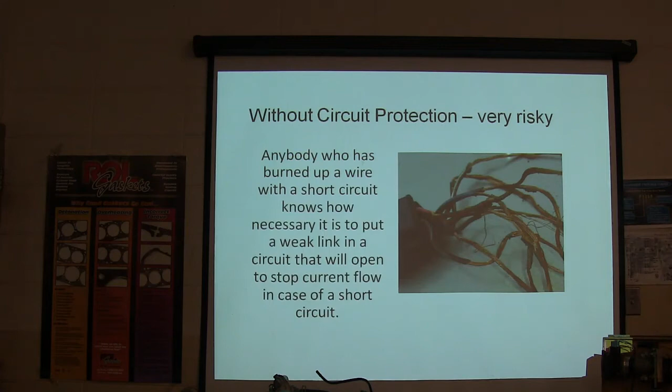Anytime you don't have circuit protection, you're taking a lot of risk. If anybody's seen wires that burned up, you can have a piece of wire this long inside the cab, and if the insulation burns off, it'll fill the whole cab up with poison smoke. Really bad news. So in order to protect the circuit, you've got to put something in there that will fail if a short circuit happens.

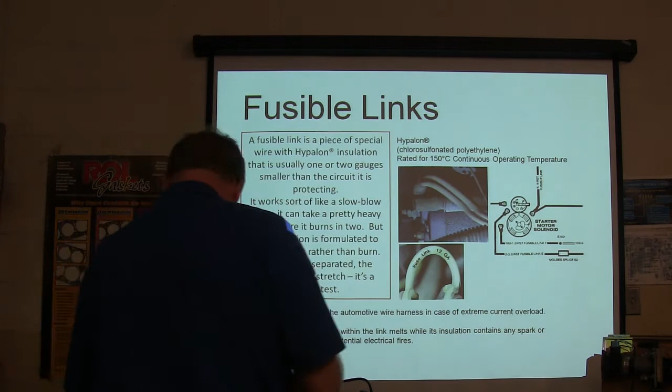That makes sense, you don't actually want all that. It sounds like something that would be really silly, but here's the fusible link. A fusible link's insulation is usually 1 or 2 gauges smaller than the circuit it's protecting.

You'll see them coming off the starter, because a lot of the time the starter is going to be the junction where they hook things up. Whenever the alternator wire goes over there and hooks up to the same post on that solenoid where the big battery wire goes, the wire leaving that alternator post makes it back to the battery, typically the shortest way possible. GM likes to put it down here on the starter. Ford, if it's got the solenoid up on the firewall, they'll put it there. And that's how it is.

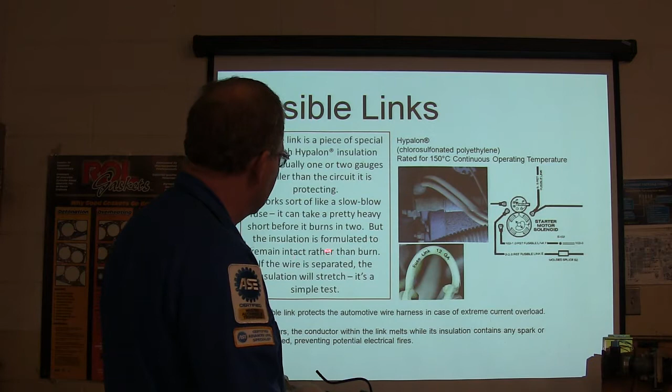It's kind of like a slow blow fuse, these fusible links are. It burns in two, but the insulation is supposed to remain intact rather than burn. If it's separated on the inside, you can't just look at it and tell—you're going to have to stretch it. If it'll stretch, it's burned in two, right.

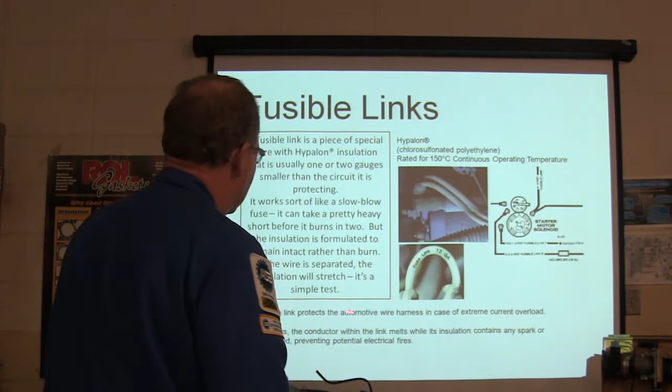It protects the automotive wire harness, and it doesn't just blow like a fuse. It takes a really, really strong short, a lot of current, to blow a fusible link. That 12 gauge fuse link is probably going to be protecting a 10 gauge wire or something.

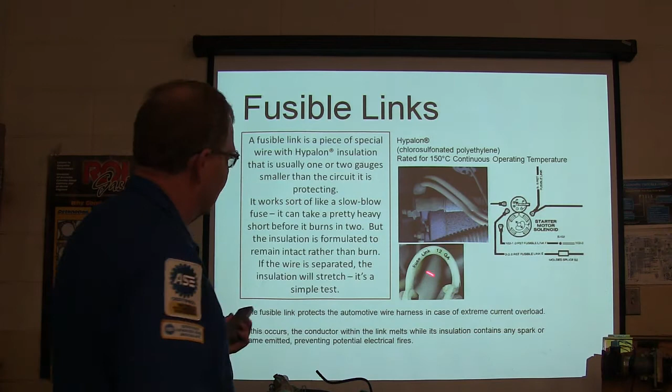So you've got heavy current circuits. Here's what I was talking about earlier. You see this battery is hooked up to that part of the starter, and the alternator is hooked here, and they'll have a fusible link right here typically. There'll be a fusible link for other places too.

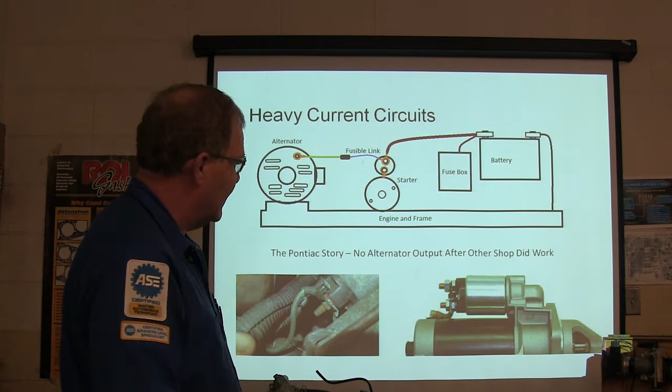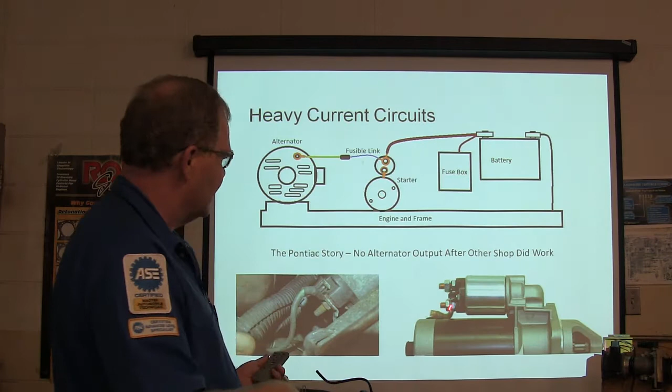So when we got in there and looked at it, we saw that they had just put it on the one that was easy to get to. It makes a difference which one you put it on, even though they both look almost just alike. So you're always going to put it on that one right there if you've got a big fusible link wire in there—you never put anything else except that under that one.

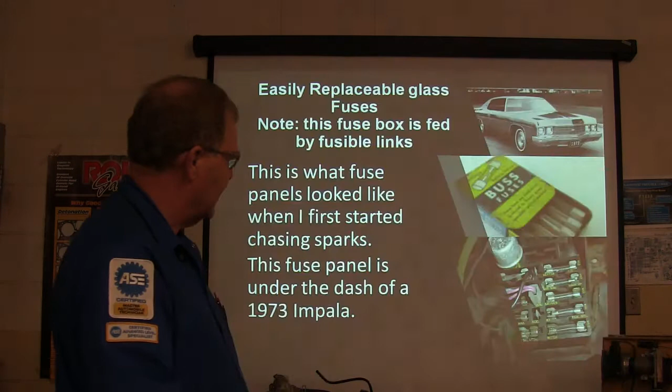Some of them will have a hard copper strap going down in there. Now, easily replaceable glass fuses, like these right here—when I first started working on cars, that's what cars had on them, glass fuses. Some of the Volkswagens had funky looking ones. That's what a fuse panel looked like when I first started. This is a 73 Impala, and those are the kind of cars that was out there.

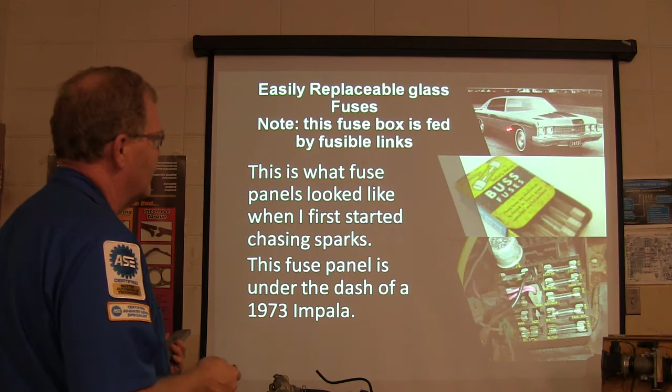And that's me sitting on my Volkswagen Bug, that was a 58 Volkswagen Bug. We shaved 125 thousandths off the cylinder head on that thing. My dad had a shop. And boy, that thing looked like a Porsche. It was a ragged looking thing, but it would fly. But that's what the old Volkswagen fuses looked like.

You probably noticed we lived in a sepia tone world back in those days. Everything was a sepia tone, it wasn't even in color. You notice all them pictures are like that? No, actually, that's not the way it was—this is just the pictures have gotten rotten.

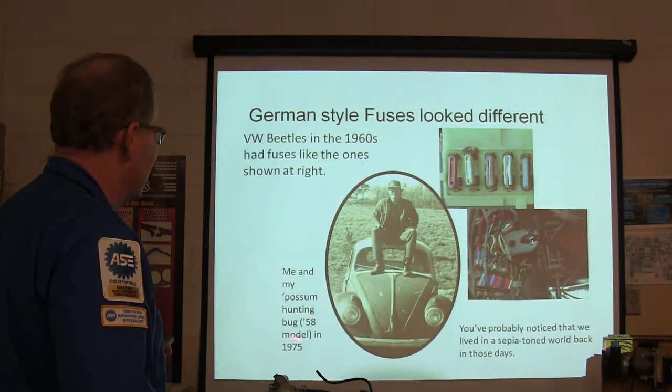Hope they don't come get me on that.

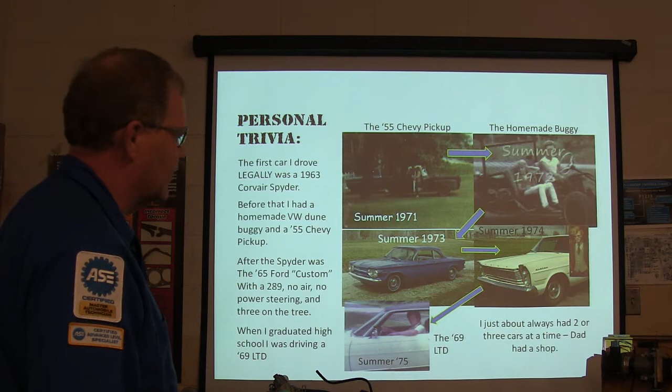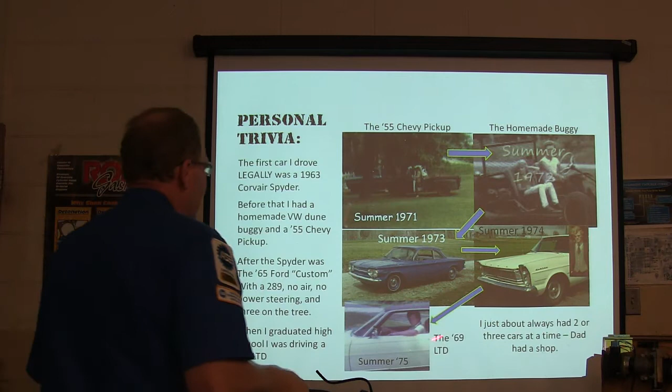In summer of '74, I got this '65 Ford Custom, and it was 9 years old then. I sold that car for $200. It still ran real good. But that's what cars cost back then. I mean, you could buy a 9-year-old Chevy pickup for $150 because they were just sitting there. There's a '69 LTD, and when I graduated from high school, that's what I was driving then. I was just about always had 2 or 3 cars at a time. I always had something to drive. When your dad owns a shop, you're never short on anything to drive.

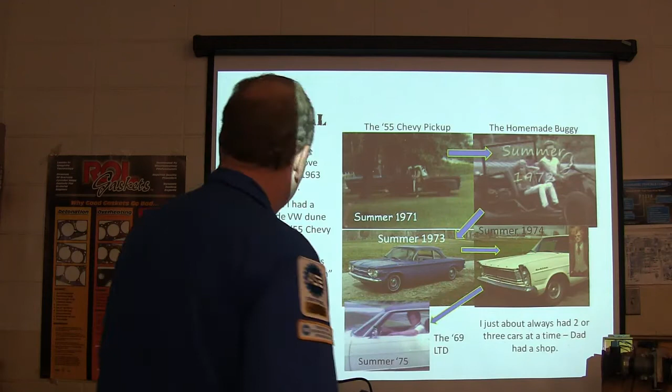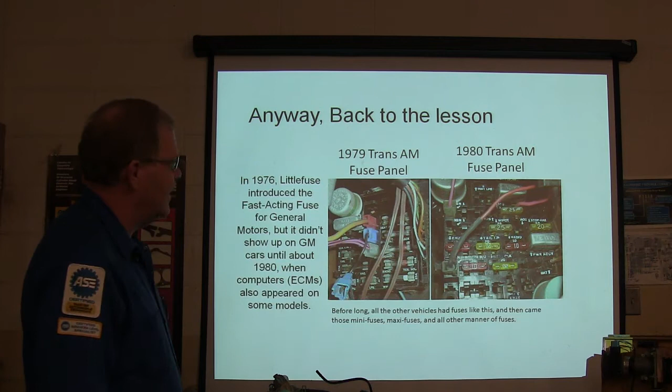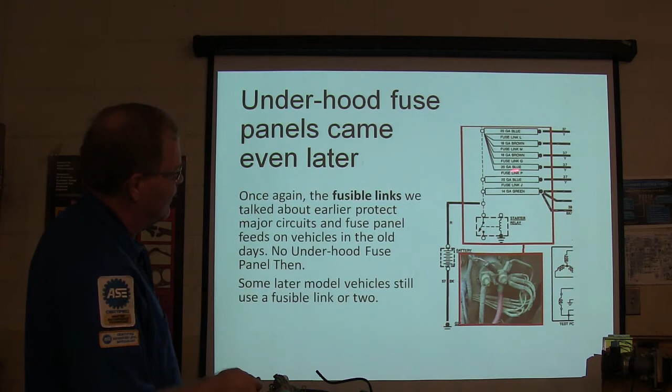Now see all these fusible links coming off that thing? That's the junction that Ford was using, and they would feed everything off of that. Fusible links were all different gauges. They'd even give you the color of them and all that sort of thing, and the major circuits were fed by those.

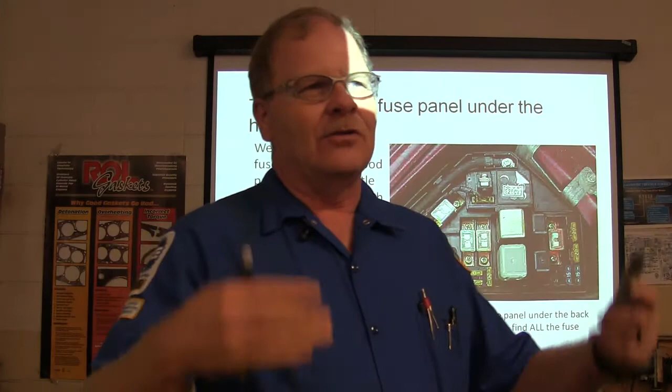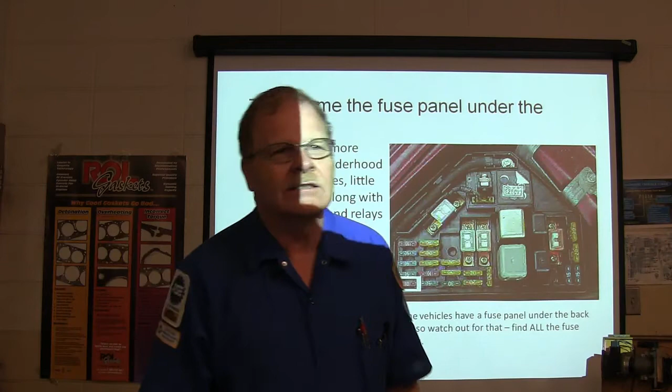Now then came the fuse panel under the hood. We didn't have fuse panels under the hood back in the day, only fuse panels under the dash. Now you may have 2 under the hood and 3 or 4 in the car. Some have one under the back seat, one on the right side of the dash and on the left side of the dash, just all over the place. You've got to make sure you find all the fuse panels when you're working on one, so find them all.

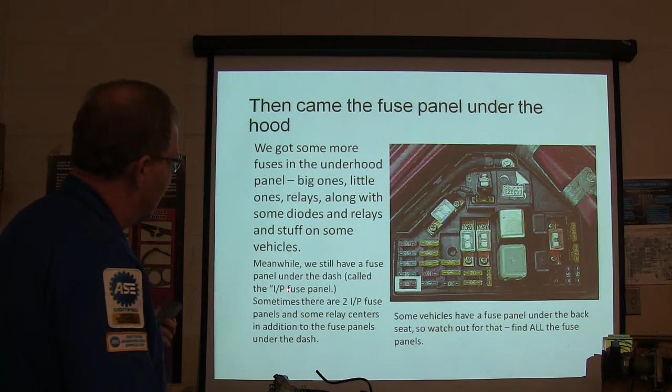We've got to have a fuse panel under the dash called the IP fuse panel. If you see IP fuse panel, that's instrument panel fuse panel. Sometimes there's 2 and so on and so forth. So you've got to manage the loads.

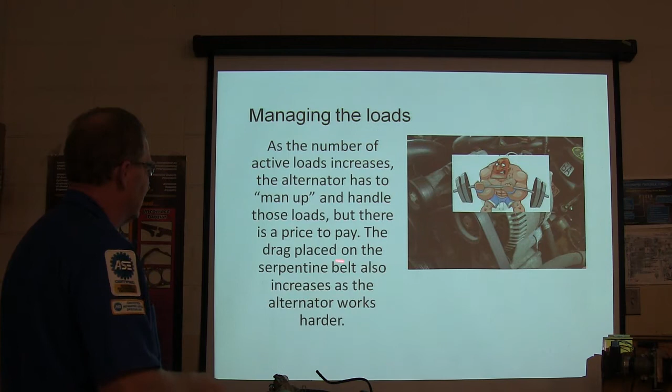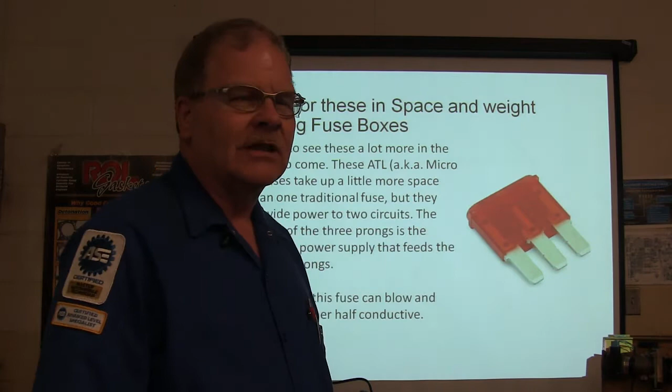You ever seen a fuse like that? A 2-sided fuse. One side or the other can blow, but you've got to replace the whole fuse. That's sort of a raw deal, isn't it? There's a bunch more. I've got a box with some of those in there in case we ever have to have any, but half of it can blow and leave the other half conductive.

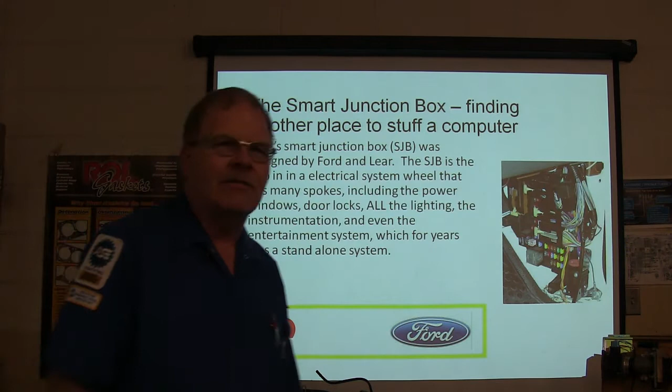Now the smart junction box, they're going to find another place to stuff a computer, so let's just put one in the fuse box, you know what I mean? That's what they do. The smart junction box is a hub in the electrical system wheel. In other words, not a steering wheel, a system wheel. It has a lot of spokes.

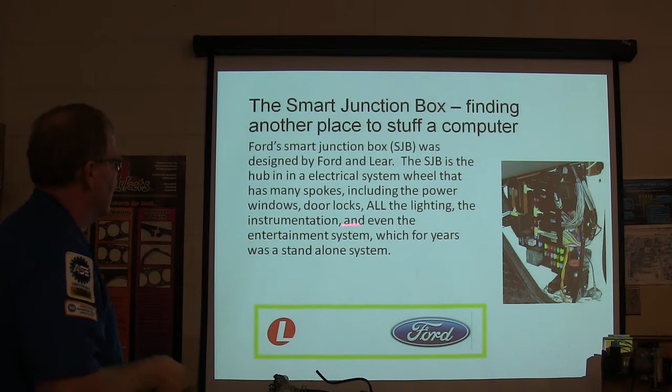All the power windows, door locks, all the lighting, instrumentation, even the entertainment system, which for years was a standalone system. When Ford first came out with what they might call a body computer, they called it a generic electronic module or a central timer module, which was the cheaper version of that.

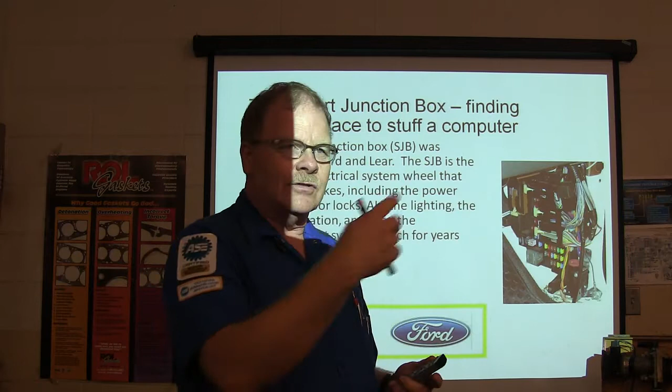It basically started doing neat stuff, like in 1995 on the Windstar, it had a little GEM module in there, and it handled the timing for everything. Like your seatbelt light would come on when you was driving down the road, or any light that would come on and go off after a certain amount of time. Or it would handle the wipers, the interval wipers.

So if you were setting your interval wipers on the lowest setting, and maybe they're wiping every 5 seconds, when you're driving down the road it knew how fast you were going, and it would make them wipe every 2 seconds. It would also, some of the things nowadays will change the radio volume a little bit, turn it up when you're driving. When you hit a certain speed, it'll turn off the interior lights, even if a door switch is saying they ought to be on, because it knows this guy ain't driving 40 miles an hour with the doors open, right?

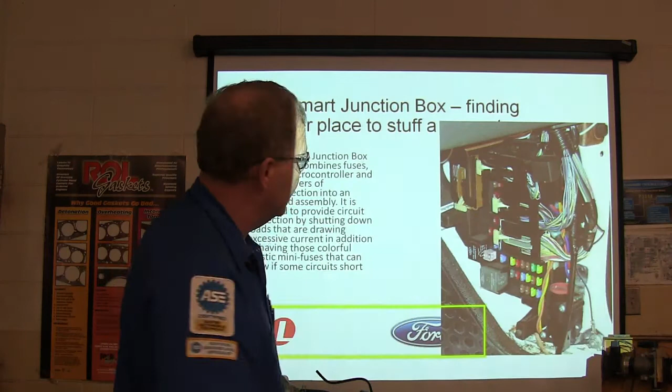Okay. The smart junction box, you're going to find another place to put it in there. Currently, it combines fuses, relays, microcontroller, layers of interconnection into an integrated assembly. Big old thing. Now my pickup truck, my '07 F-150, doesn't have a smart junction box on it, but it's got an inside fuse panel that's pretty big and heavy duty. Got lots and lots of fuses in it. But just because you see a great big fuse panel doesn't mean you have a smart junction box, okay?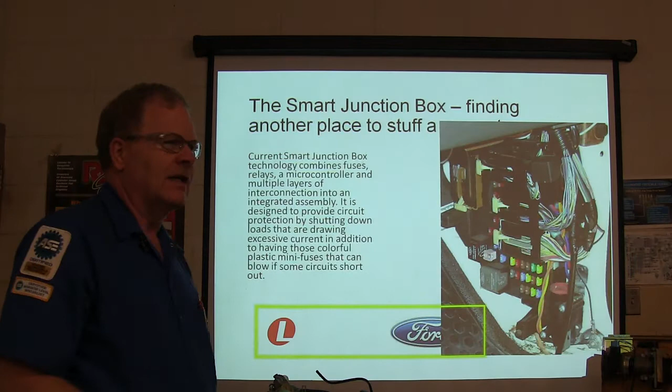All right. And having those colorful mini fuses that can blow if something shorts out. You know, these pretty little fuses right here, how cute they are. What I like to do though, when I'm looking at a circuit that's not working, is find exactly which fuse I need to look at instead of just checking them all, because you'll miss something if you're just randomly checking fuses. You may hit it, you may not.

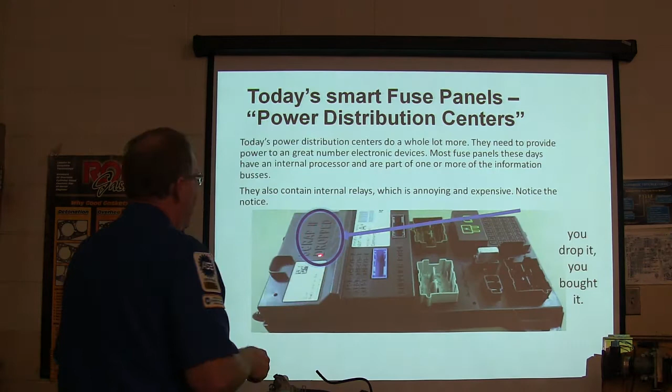All right, now today's power distribution centers need to provide power to a lot of electronic devices. They got internal relays that you can't change, they're just built into the box. Talked about that a little bit before. Look at that right there. Scrap if dropped. I got one over there somewhere. I should have it ready to wave in front of the camera. It's a smart junction box, and it says if you drop it from 20 centimeters, which ain't very far, then it's junk. You got to replace it.

In other words, if you're holding it in your hand and you drop it and it hits the floor. You know, I notice around here whenever somebody drops something and they bust it, I'll say, what happened to this? They don't say, I dropped it. You know what they say? They say, it hit the floor. That sounds like it's the part's fault, you know, like if the camshaft is screwed up or something.

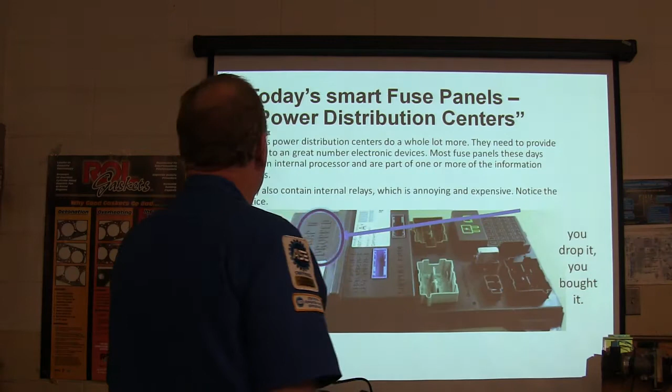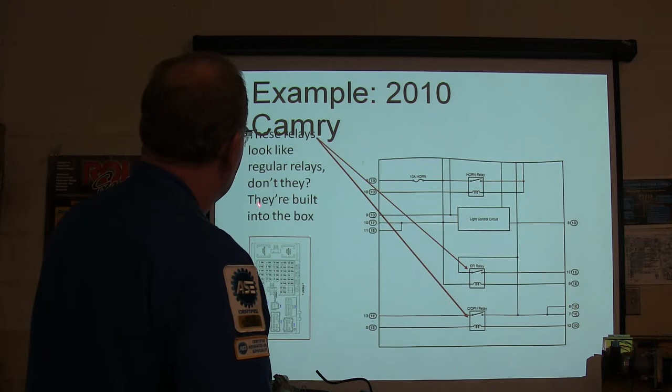All right. So, these look like regular relays on this Camry. See the EFI relay, the C-open relay, light control circuit, the horn relay. They're built into the box. You got to replace the box. If you discover that a relay is bad, like your EFI relay, you got to replace the whole dadgum box.

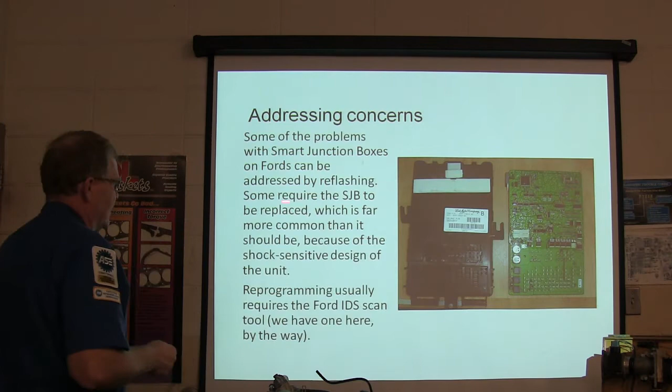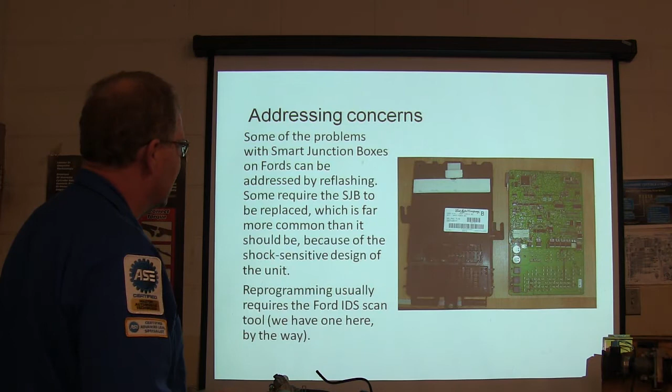Get used to that. Now, some of the problems with smart junction boxes on Fords can be addressed by reflashing. You can actually reflash the smart junction box. You see that reflashing we did over there the other day on that Duramax? Some of y'all were over there when I was doing it. I was reflashing that body computer on that thing. But he went and got one and put it in there and reflashed it. But anyway, failure is a lot more common than it ought to be because it's a shock sensitive design. Reprogramming usually requires an IDS scan tool, but we got one of those here.

We worked on an '07 Toyota Avalon. I don't remember what we did to it, but we had the battery disconnected or something. When he got it back, he said his moonroof wouldn't work. We hadn't worked on that. And when I did the research on it, it says until you've programmed all of the power windows so that they know top and bottom, the moonroof won't work. So we had to program all the power windows, and when we got them all programmed, the moonroof came online. Which is really weird. Identifix is really helpful in a situation like that. Dash lights quit working, stuff like that. All these are the kind of problems you may have.

Here's a Mustang story. I actually saw this happen. Girl came walking in here one day. She said, "My Mustang's park light stays on all the time." One of the segments is on all the time. It's going to kill my battery. And it was the bright one, the stoplight / turn signal one. And she didn't have those sequential lights either. She just had the ones that blink.

But look at this right here. This segment is on all the time. So what strikes you about that schematic? See this here? Lamp 2, lamp 1. There's lamp 2 and lamp 1. Now we'll be talking about these two right here. Okay. You notice this? They're coming out of there on different wires.

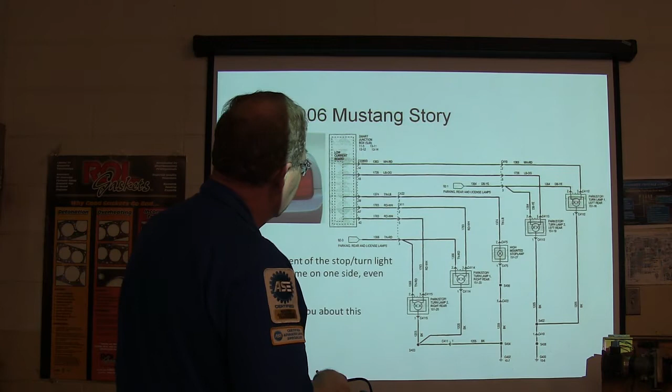They did that so that whenever they decided to let it sequentially flash, this box would be able to handle that. Back in the day, I remember in the late 60s, they had some of these Cougars that had sequential turn signals, Thunderbirds in the mid 60s, stuff like that. They had a little box in the trunk that was only there for that, and had some relays and some crude electronics in it. And when it went bad, everybody just bypassed it and made the lights flash normally because they didn't want to pay the big bucks for that.

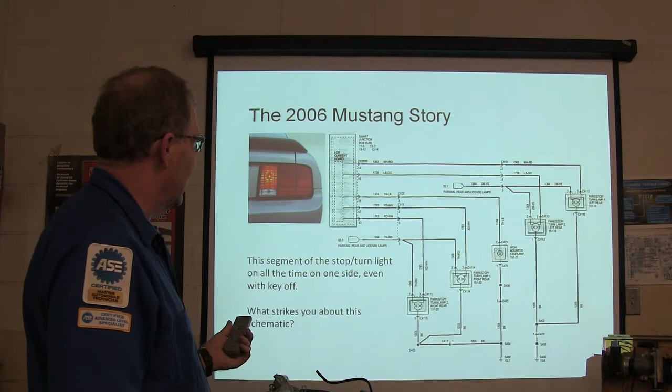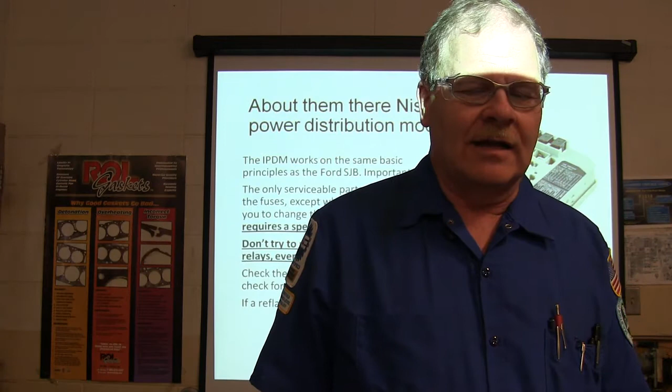But anyway, so what do you think we need to do about that? Your reflash would have took care of it. But at the time, what I told her, I says, why don't we just go ahead and take the bulb out of this one? Because it's going all the way to that box up there, and that box has got it turned on. She said, well, I guess I'll have to, and I found out it was going to be like $400 to buy the part and all that. She said, I guess I need to start saving money for that. And I says, what? You're going to pay $400 to make that one light work? I would let that sucker stay out before I'd pay $400 to get that one light working, you know what I mean?

All right, Nissan Intelligent Power Distribution Module. That's what they look like right there. The IPDM works on the same basic principle as the Ford Junction Box. The only serviceable parts are the fuses, except where certain TSBs allow you to change the ECM relay, but that requires a special tool. Looks like you ought to be able to just snatch them out of there, don't it? Now, you can, but if you push them back in there, it may not work right ever again. Don't try to remove any of the other relays, even though it looks like you can. Now, this is on these Nissans. Always check for TSBs. If a reflash won't fix the IPDM, you replace it.

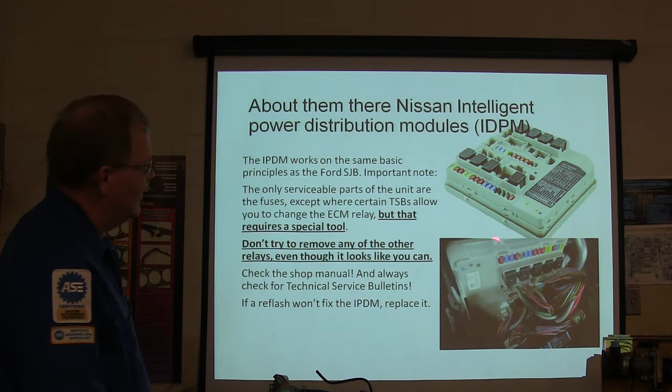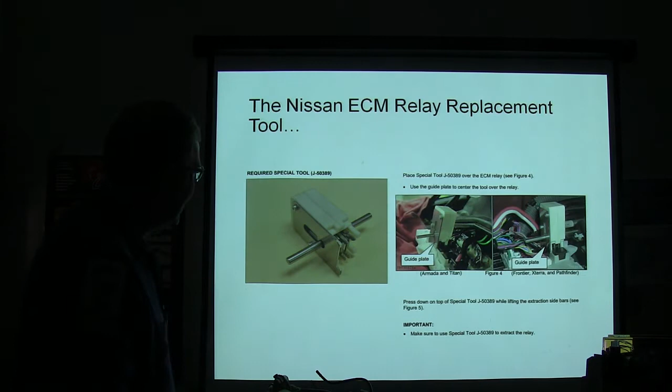All right? That's what the tool looks like. See that right there? There's a guide plate. This is actually from Nissan. Required special tool J50389, and you see how you put it in there, and it hooks around that relay, and it pulls it absolutely perfectly straight out of there. Make sure you use that to extract the relay. That's not negotiable.

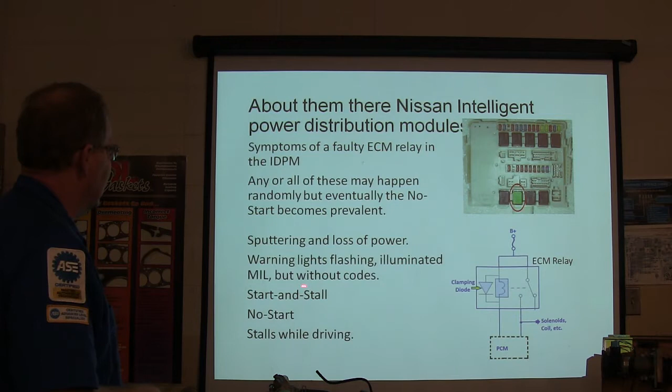So here we're going to have symptoms of one of those. Any or all of them may happen. Sputtering, loss of power, warning lights; sputtering and loss of power would be that relay. Warning lights, flashing illuminated MIL without code, start and stall, no start, stalls while driving. These kinds of problems go back to the fairly common happenings at the fuse box.

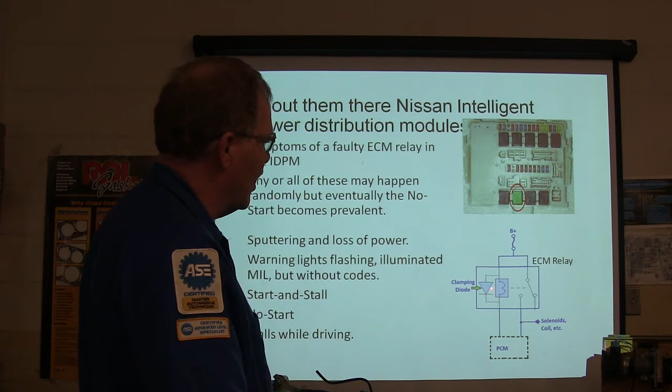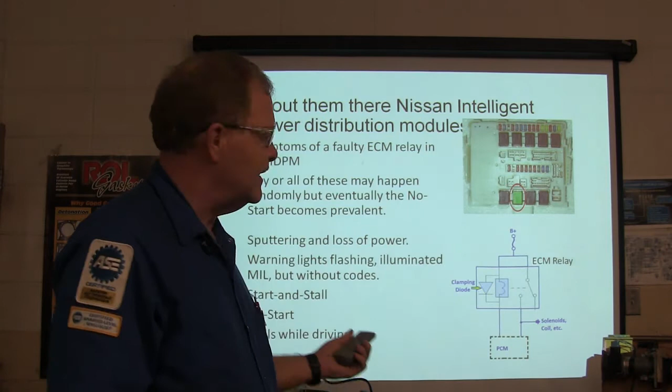And so you got a clamping diode right here in that ECM relay instead of a little resistor. The clamping diode is there so that when you de-energize the relay, the collapse of that magnetic field doesn't create a high voltage spike that goes screaming back into the PCM and makes it go bleh. I've actually seen that kind of thing happen when there wasn't a clamping diode in play. You just put any relay in there that doesn't have a clamping diode in it, you may be buying a PCM.

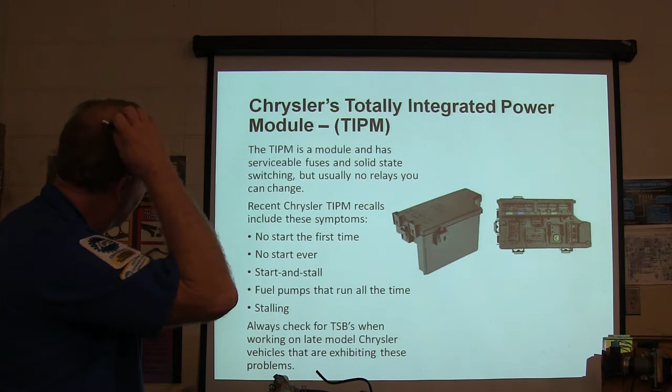All right, Chrysler's Totally Integrated Power Module, that's what it looks like. It's got serviceable fuses and solid state switching, but no relays you can change. They're all built in there. They got some little things in those Chryslers that look like capacitors. If there's a short, it'll actually open that circuit, and when it cools off, it'll close it back up again. It doesn't have any moving parts.

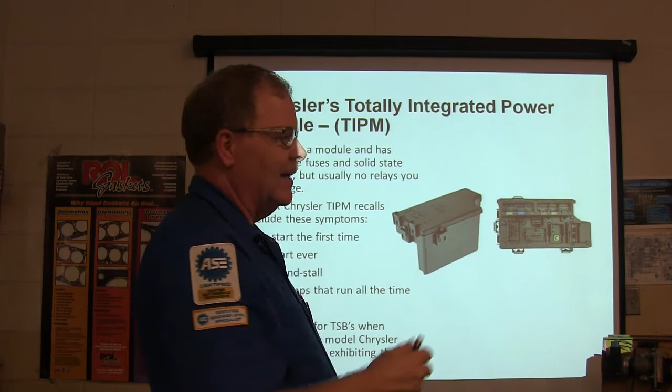No start first time, no start ever, start and stall. These are some of the symptoms. Fuel pumps that run all the time, stalling. Always look for TSBs when you're working on late model Chrysler vehicles that have these symptoms. See that? No start first time; in other words, they may try to start it and have to start it again.

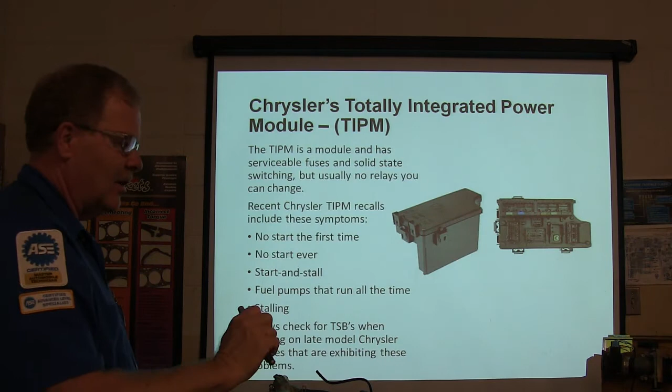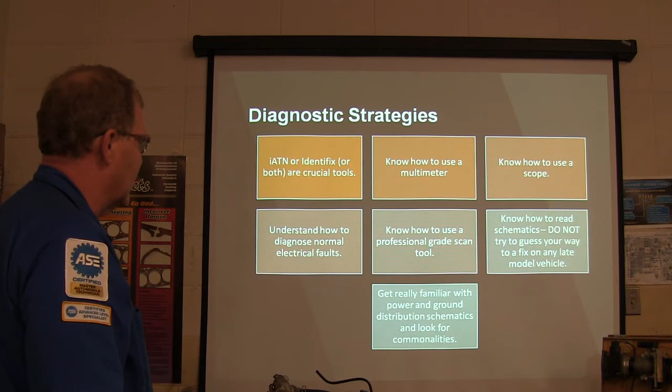Now, IATN or Identifix are crucial tools. Know how to use a multimeter. Know how to use a scope. Understand how to diagnose normal electrical faults. Know how to use a professional grade scan tool. And know how to read schematics. Don't try to guess your way to a fix on any late model vehicle. Get really familiar with power and ground distribution schematics and look for commonalities.

There was a little trainer car that I used to have out there. I actually gave it to Adam, took it over to Elba. It was a little Plymouth Neon, not a Dodge. There were two ground wires right there above the driver's side headlight. And I could take both of those ground wires off and put them down there where you couldn't see them. And that light wouldn't be off, it would be dim.

The car wouldn't start, the scan tool wouldn't talk, and the wipers would run all the time. So if you turn the car on, the wipers would come on, the car wouldn't start, and one headlight would be dim. All because of those two little ground wires being disconnected. You can have a disconnected ground and have all kinds of screwy problems. Or, let's say you turn on your turn signals and something else comes on. You know what I mean?

You're basically looking for ground problems. You always want to see, what else is not working? This isn't working, but is there anything else that ain't working? If so, you might say, well, this isn't working, and that's not working, and that's not working. Let's see if these have anything in common. You might find out some yo-yo left a connector unplugged. It's feeding all three of them.

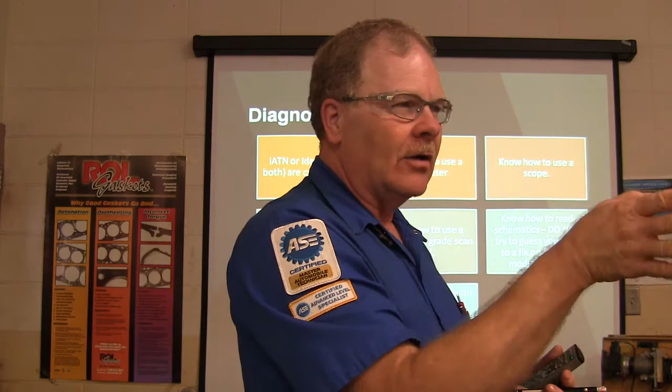See what I mean? Now, you don't want to beat your head against the wall working and working when you could have gone over and click. Really good mechanics will either know the vehicle well enough to where they'll know which connector to look at, or they'll know how to go find it in the book. And that's really important too.

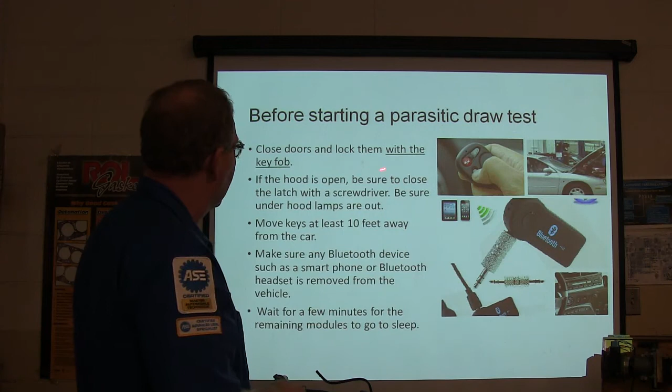All right. Before starting a parasitic draw test, close the doors, lock them with a key fob. If the hood's open, be sure to close the latch with a screwdriver. Be sure the under hood lamps are out. Move the keys at least 10 feet away from the car. Make sure any Bluetooth device such as a smartphone or Bluetooth headset is removed from the vehicle. Wait a few minutes for all the modules to go to sleep. Really important. Lock them with the key fob.

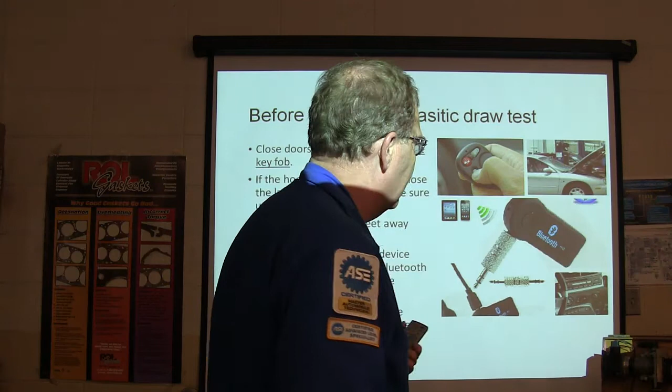We had a 2010 Mustang out there one day. He said the battery's going dead on it overnight. I disconnected the battery and put one of our little yellow meters in between the battery terminal and the post, and it was pulling 2 or 3 amps. And I said, walk away. We walked away for an hour, came back, all the draw was gone, and we did further checks and found out she needed a battery. That's all she needed. So you could actually work yourself into the ground going wacky about that kind of stuff.

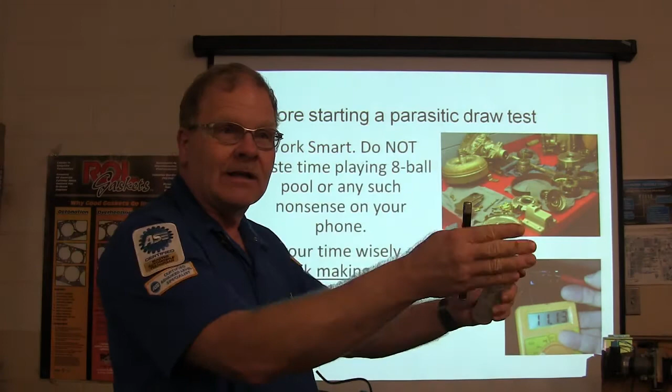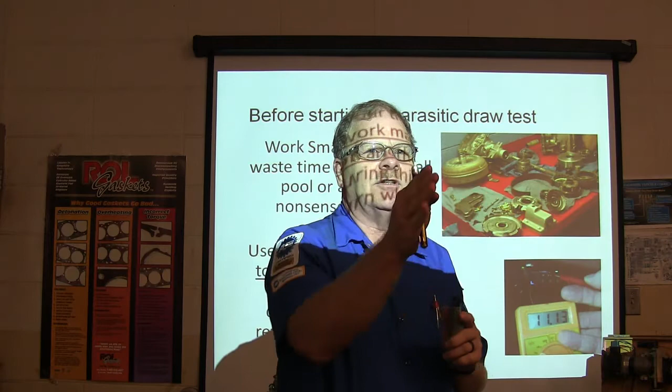During a parasitic draw test, don't waste time playing 8-ball pool on your phone. Go do something else while you're doing that waiting game. You're not going to make any money standing around a shop like this. And also, you won't get all your worksheets done drifting from job to job, just talking to the people that do interesting stuff. You're supposed to turn in your own sheets, having legitimately done the work, right? Go to work making money on another vehicle during that time and return when that job is done.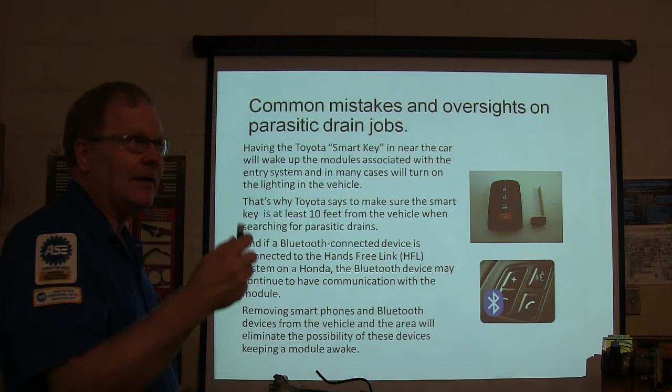If you got it up in the air and you got the oil drained out of it, and it decides to start the engine because you left that thing in there, that'd be pretty bad, wouldn't it? You gotta understand all that.

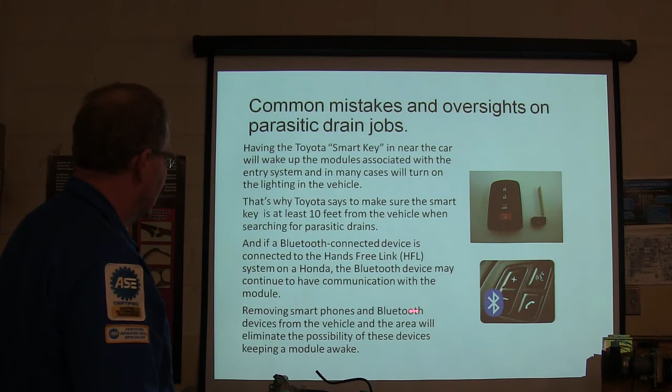If a Bluetooth connected device is connected to the hands-free link on a Honda, the Bluetooth device may continue to have communication with the module. Take smartphones and Bluetooth devices out of the vehicle area to eliminate the possibility of them waking up a module.

Now, it's not good to pull fuses out without knowing what they feed, so there are all these modules. You know, they charge up and it costs you a bunch of time and all that. Know which fuses feed modules, because when you unplug one of those fuses and reinsert it, you may see a sudden new draw that wasn't there before. So you'll have to take a break, lose time while you wait for it to go to sleep.

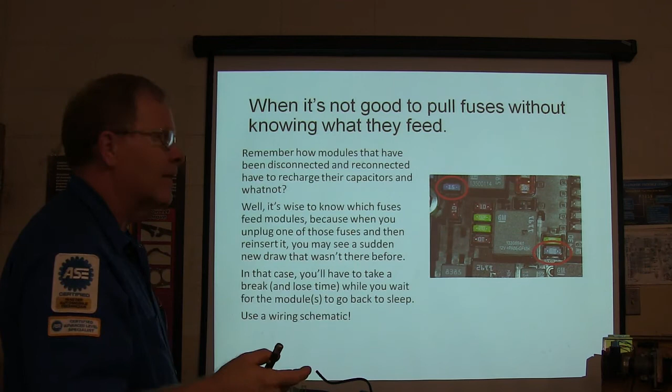You can also use, and I can't remember if it's in this presentation, not a heat gun, but a FLIR camera, you know, forward-looking infrared camera. You can measure voltage drop across fuses to find parasitic drain. Put your meter on the lowest setting, and you can go across each one of those fuses with your meter, just like you see this one hooked up.

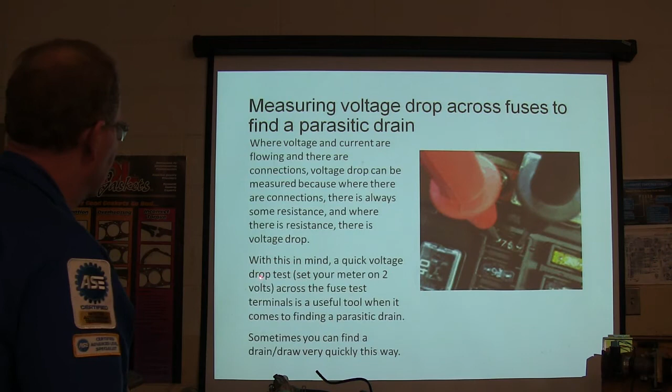And if you find one of those fuses drawing, that's got voltage drop, because you're going to have voltage drop anywhere you got any kind of a connection. That's why you got to have a meter set real low. Quick voltage drop test, set it on 2 volts. Now sometimes you can find a parasitic draw really quick that way, and the amount of voltage drop is really small. So you got to be looking at millivolts rather than volts.

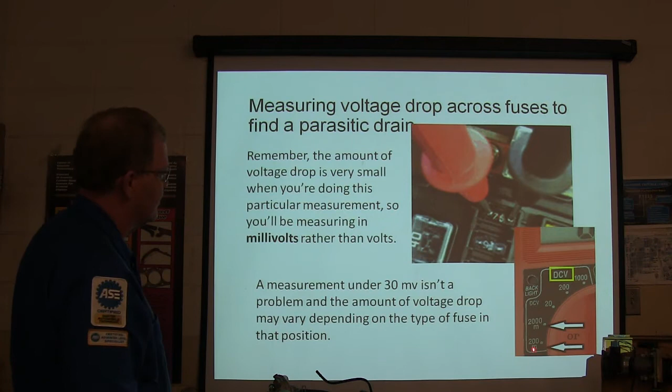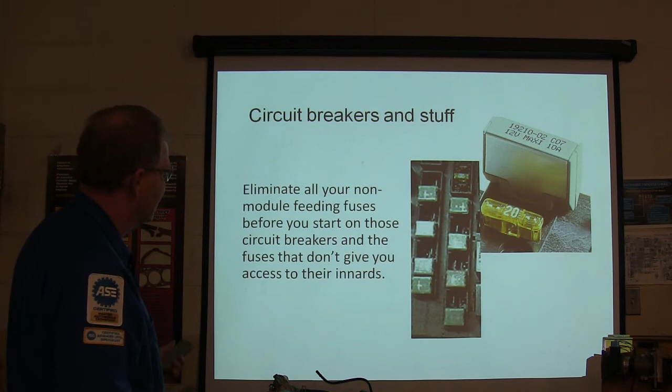All right, a measurement under 30 millivolts isn't a problem, and the amount of voltage drop may vary depending on the type of fuse and the position. So you're setting it way down here, you know. All right, so circuit breakers and stuff. Eliminate your non-module feeding fuses before you start, and the fuses that don't give you access to their innards.

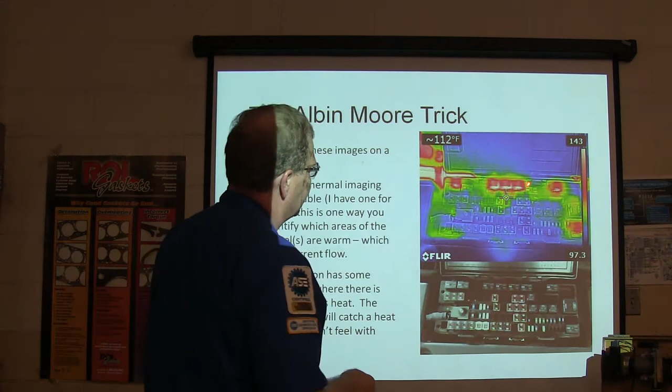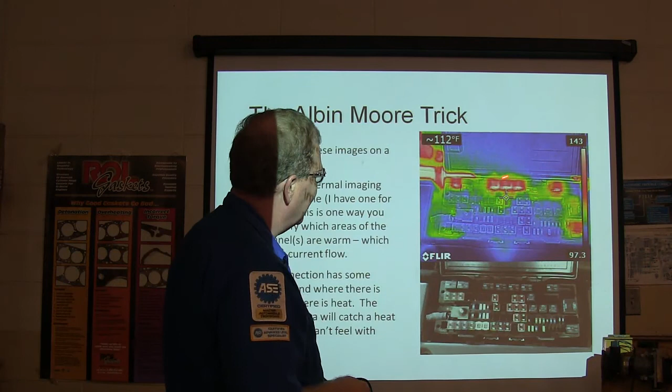And see, that's the picture I took. We were working on an F-150 or something when I took this picture here. See the hot fuses? Like if it's been sitting there all night, or 3 or 4 hours and the battery's going down and nobody's opened the door, but you got the hood up and you pop that cover open, and I shoot that thing with my forward-looking infrared camera and I see a bunch of warm places, that's a really good place to look.

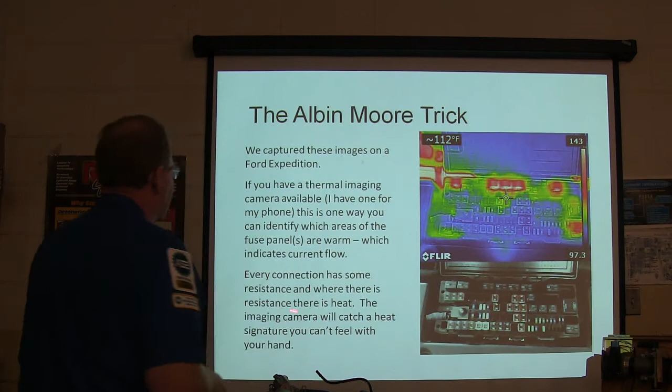See what I mean? All right, every connection's got some resistance, and where there's resistance, there's heat. And it'll catch a heat signature you can't feel with your hand. All right, here we go.

A vehicle comes in with a complaint that the instrument lamps illuminate when the brake pedal is depressed. Technician A says the wiring under the dash near the brake lamp switch is likely to be shorted. Technician B says a bad stop tail lamp bulb is probably the cause. Who's right about that? Really? That's going to be B.

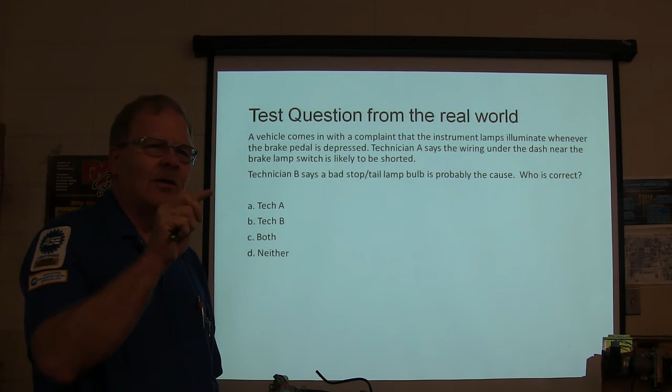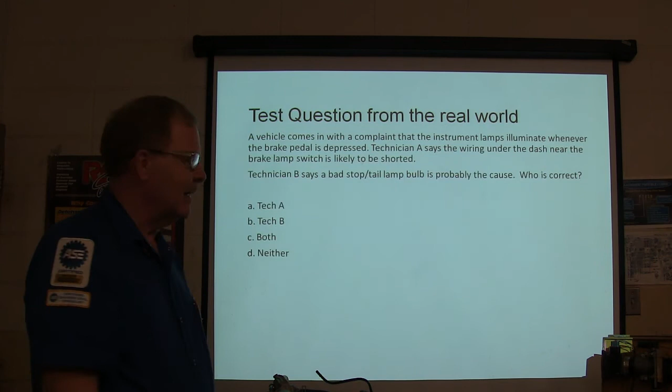Inside that bulb, if those wires are touching, and I've seen that happen more than once. See, when you mash the brake, the lights come on, and if those filaments are shorted, the dash lights are actually fed on the same circuit that the tail lights are, and it'll backfeed through the tail lights and make that come on. I've seen people come and say, "Hey, I got a problem here," and I say, "Well, just pull all the bulbs out and see if the problem goes away. If it does, you got a bad bulb." And it used to be more common than it is now.

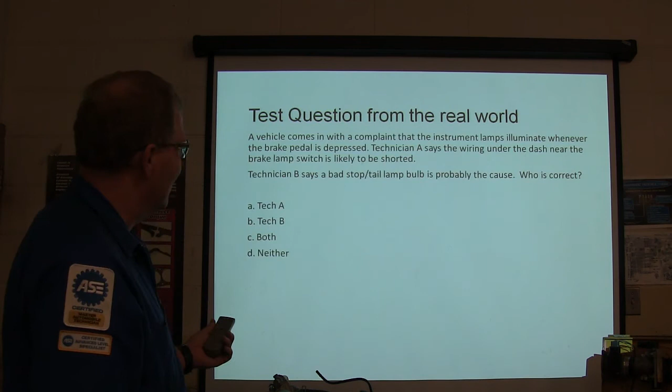Now, technician B has the best handle on it. This right here is what the bulbs are made like. See that? This is from your tail lamp. This is your stop turn lamp. You see, this is grounded right here. See how that's done? All right, now look at that. If that gets shorted, it'll backfeed. And it'll make your dash lights come on when you hit your brake. Ta-da! That was a quickie, wasn't it? All right.

Okay, y'all were trying to turn into a skeleton, weren't you? Oh, my hand.